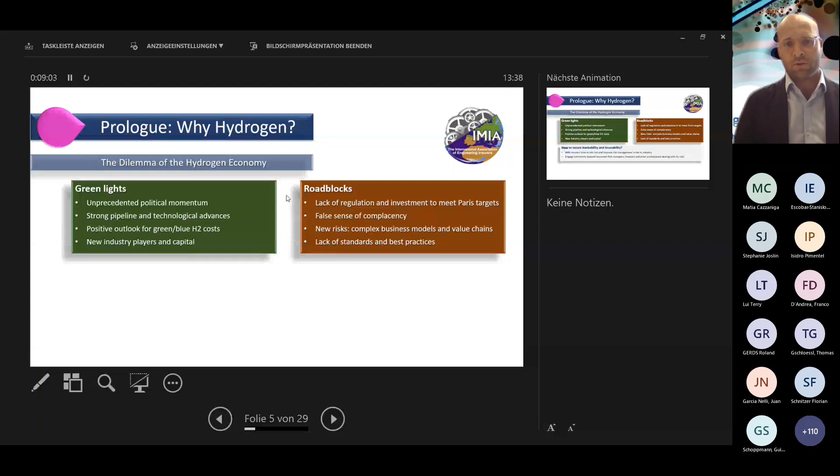Now, for us as IMIA, the question really was, how can we secure insurability and bankability in this vital industry? Our mission, of course, as IMIA is to make a meaningful contribution when it comes to risk management. And we want to engage a community beyond just insurance professionals. We want to reach out to risk managers, to investors, in fact to anyone dealing with risk in this vital industry.

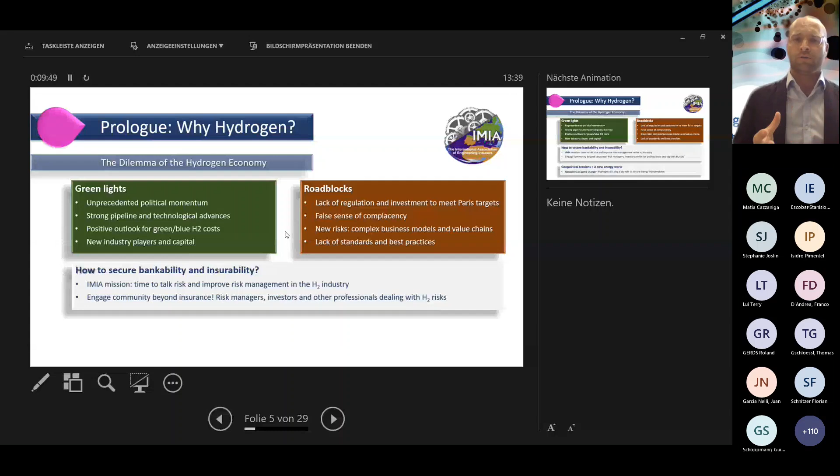And there's one last thing I would like to say, and that's probably true for all of the reports that you've read about hydrogen so far. They have been published prior to the geopolitical tensions that we are seeing at the moment. And we are waking up to a new energy world, one that is clearly focused on renewable energy and on energy independence. And it is clear that hydrogen is going to play a key role in this world.

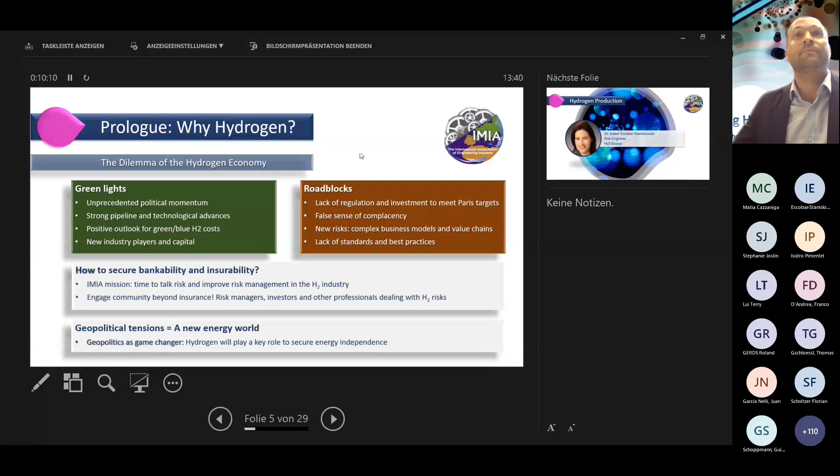Thank you, Carl. So my name is Isabel Escobar from HDI Global, and I want to show you the hydrogen production methods. The first slide.

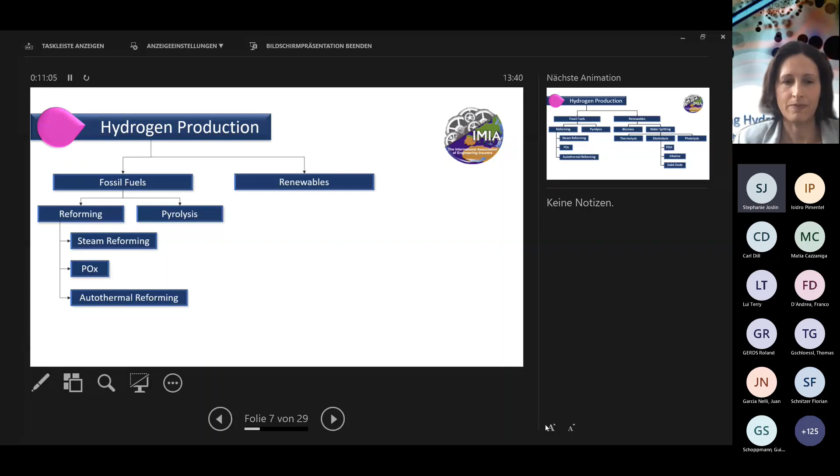So, well, as Carl mentioned, hydrogen is a very promising and powerful energy carrier. It's not found freely in nature, and therefore it must be obtained or produced from other compounds. The conventional way to produce hydrogen is from fossil fuels. Hydrogen production from fossil fuels accounts for about 96% of the total hydrogen production worldwide, which is about 90 megatons today.

However, in order to reduce the CO2 footprint, there is more focus on producing hydrogen from renewables. So the main development that we are seeing right now is the hydrogen production from electrolysis. Isidro, could you please put the electrolysis?

So what we see is that nowadays about 4% of the hydrogen production is done from electrolysis, but we expect that in the next years about 8 megatons of hydrogen is going to be produced from electrolysis.

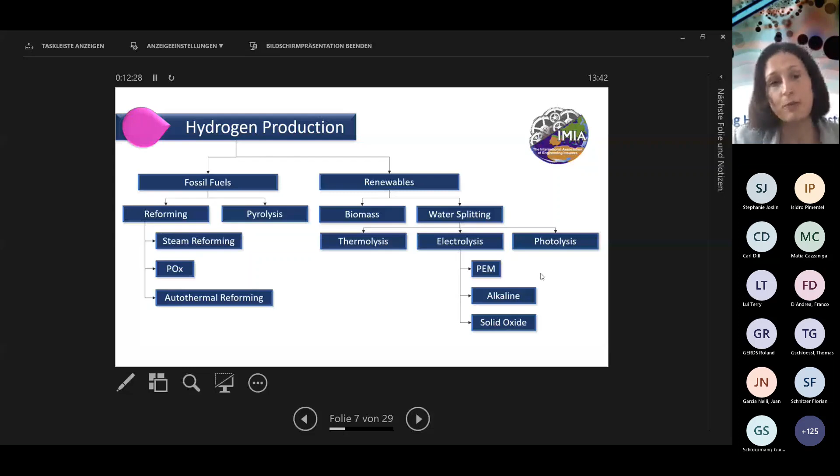There is a very interesting graph from the International Renewable Energy Agency that shows that up to the year 2050, hydrogen production from renewables will increase from 4%, what we have right now, up to 22%. You can see the graph right now. What is very interesting also in this graph is that hydrogen production from coal will increase from 18% to 33%. This is due to geopolitical effects and also due to costs. Next slide, please.

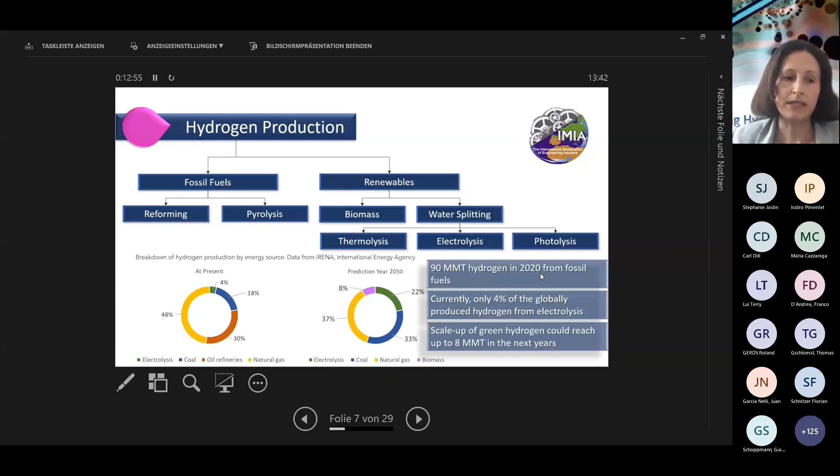So what we see today is that in order to meet the net zero emission goals, there are great attempts, for example, to go from gray hydrogen to blue hydrogen. In the case of conventional hydrogen production methods, like steam reforming, carbon capture, utilization, and storage (CCUS) is being used in order to retrofit or revamp existing plants.

Some advanced catalysts are being used for post-combustion CCUS. However, due to the cost increase compared to the original technology, we do not expect much focus on the development of greenfield projects of SMR with CCUS. However, we do see increasing projects for revamping and also for retrofitting CCUS in existing facilities.

There is a different case for partial oxidation, since it is a highly exothermic reaction and the reaction energy can be used for steam production. The higher operating cost due to higher pressure, and also the cost from CCUS, can be partially offset with the steam production. Therefore, here we do expect some greenfield CCUS for partial oxidation and also retrofitting.

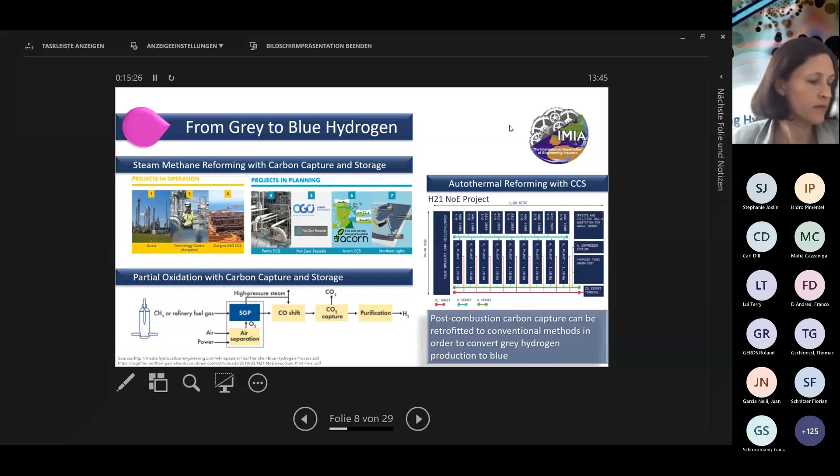Thank you. So now, in the case of green hydrogen, in the last year there has been very strong development in electrolysis. Actually, electrolysis is a very old technology - alkaline electrolyzers have been used for more than 100 years in ammonia production.

What we see right now is a higher attempt to increase the efficiency of the electrolyzers, also to scale them up, and to include different materials. In the 1950s, polymer membranes were developed, and therefore PEMs were introduced into the market. And now we see a higher focus also in solid oxide electrolysis due to the development of advanced ceramics and perovskites.

So what is the future here? The future is to reduce cost, OPEX and CAPEX, by improving the operational conditions, increasing them, improving efficiency, but also introducing new materials and increasing the lifetime.

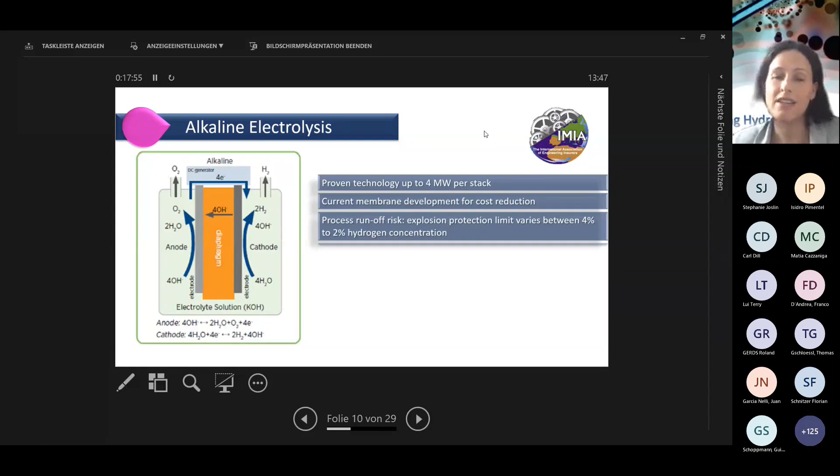Next slide, please. As I mentioned before, alkaline electrolyzers are a mature technique, and the stacks are getting bigger and bigger. From the insurance perspective, we say that they have a proven technology up to 4 megawatts per stack.

It does not mean these are the biggest megawatt stacks that we see, because more or less since the 2020s, we see almost every couple of months the news that the world record has been cracked and a bigger alkaline electrolyzer has been installed - 10 megawatts, 20 megawatts, even 30 megawatts, like the example here of a company in China, where a 150 megawatt capacity plant started commercial operation in November 2021, aimed to generate electricity from wind energy for the electrolyzers, 200 megawatts.

The thing with alkaline electrolyzers is that the membranes used are permeable for hydrogen, but also for oxygen, meaning that during load changes, there is a fluctuation of hydrogen and oxygen between both electrodes, and therefore there is an inherent higher risk for explosion or process runaway. This means some limits must be included in the process safety, and the limit varies between 2% and 4% hydrogen concentration in oxygen. Also, the diaphragm durability can be limited during the operational regime.

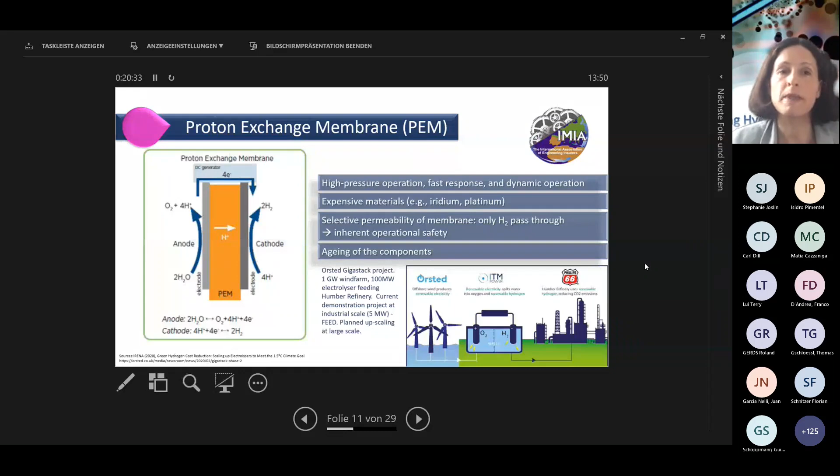The polymer membrane that is used has the advantage that it is only permeable for hydrogen, meaning that load changes do not tend to a process runaway - this process is inherently safe with respect to explosion from the reaction point of view. However, there are also problems regarding the aging of the components, and upscaling of the PEMs is not that easy due to the rare materials being used and the cost.

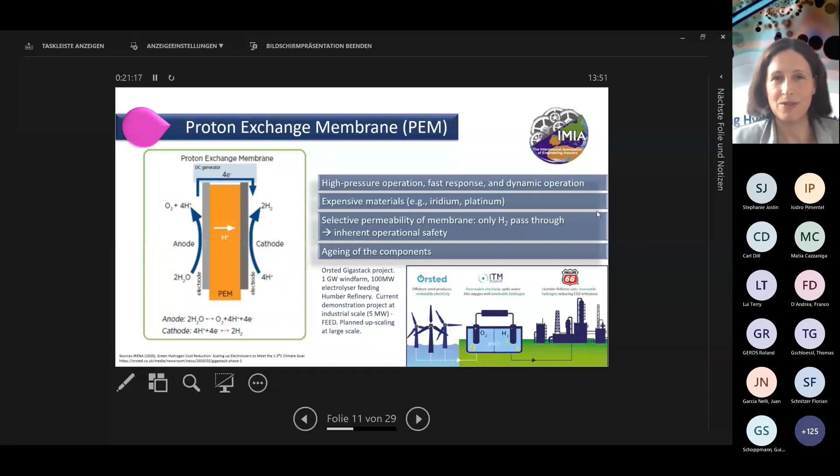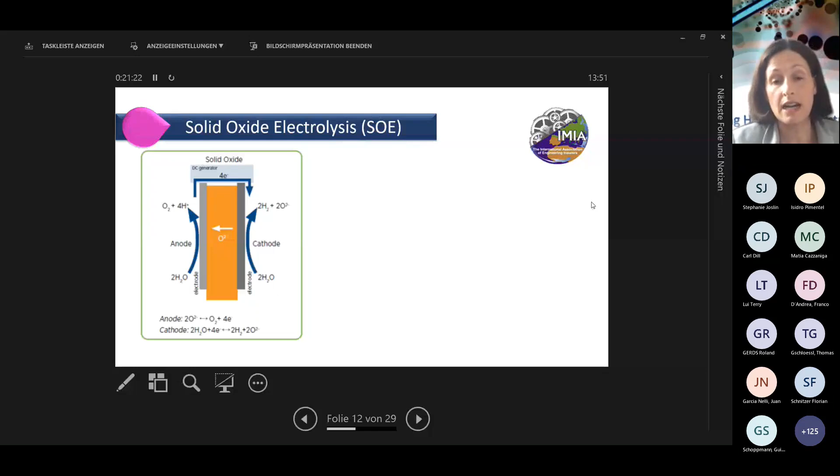Okay, so the last technology that we want to show you in regard to electrolysis is the solid oxide electrolysis. It works at very high operational temperatures of 500 to 600 degrees, meaning that the efficiency can be higher for this kind of electrolyzer, and has the advantage that it can also be used as a solid oxide fuel cell, meaning it can be used for hydrogen production, also for electricity production.

It uses advanced ceramic materials like yttrium stabilized zirconia, and for the electrodes, also advanced perovskites. So far, there are only pilot projects, therefore there is only limited experience, but it's a very promising technology. There are important pilot projects, like, for example, the Green Industrial Hydrogen project, which works with reversible high temperature electrolysis. It's a project from Sunfire and has a capacity of 150 kilowatts.

In our IMIA document, we give an extensive description of the different production methods for hydrogen, also the advantages, the disadvantages, and also the risks. So if you are interested, you're very welcome to take a look into our document. And now Isidro is going to talk about the industrial applications.

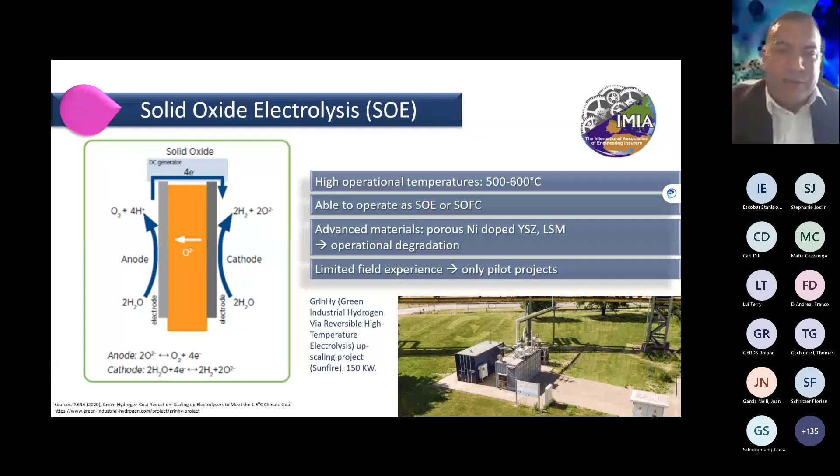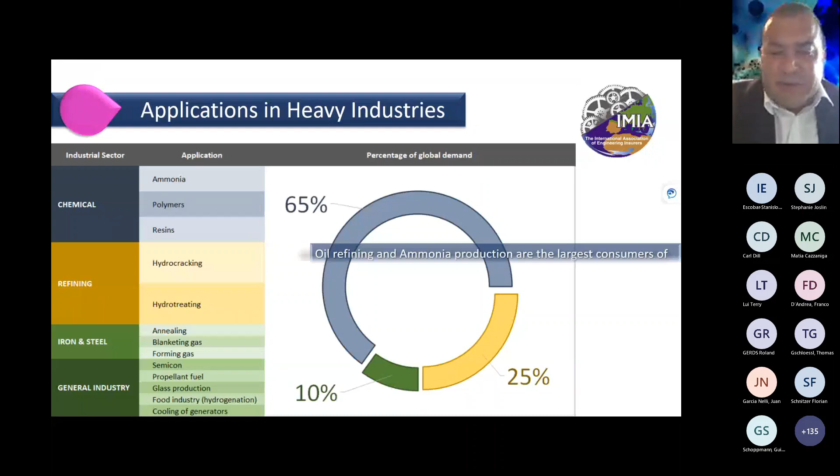Hydrogen is used as a feedstock or fuel in several industries, including petrochemicals, food industry, and pharmaceuticals, as well as metals manufacturing. For decades, hydrogen has been used as a raw material by the chemical industry, mostly in the production of ammonia and hence fertilizers, and in refineries where hydrogen is used for the processing of intermediate products. In metalworking, hydrogen is used in alloying and iron flash making, among other uses.

Especially attractive is hydrogen as an energy storage medium. As a matter of fact, the International Energy Agency recognized that hydrogen is one of the leading options for storing energy from renewables. As you might know, one of the main challenges of renewable energy is the seasonal fluctuation, which represents a big challenge for the distribution networks of the future.

Hydrogen looks in this sense very promising to be the lowest cost clean option for storing electricity in the years to come. While renewable electricity can help reduce emissions in road transport, in the areas of low temperature industrial processes and heating, fossil fuels have today a significant advantage in applications that require a higher energy density, industrial processes that rely on carbon as a reactant, or where demand is seasonal.

In these hard to abate sectors of the economy, especially hydrogen, and especially green hydrogen, could become a game changer for the decarbonization across many industries, and its utilization, in our opinion, is going to vary from small, decentralized solutions to world-scale projects with high complexity.

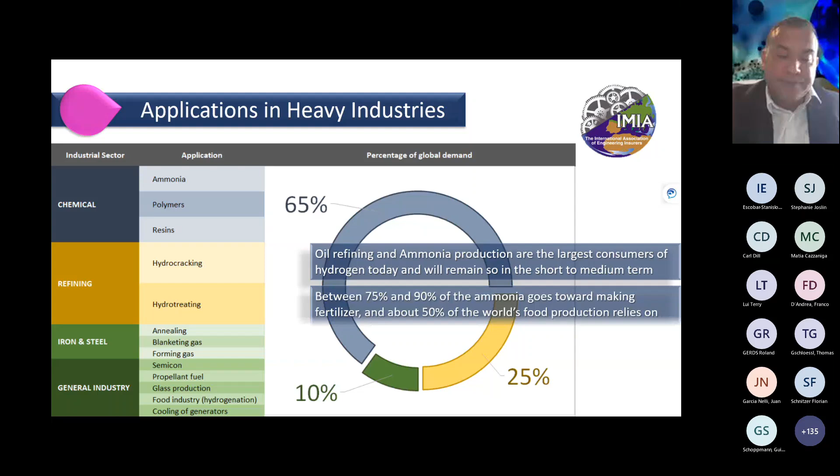Meaningful volumes. This is why it has been discussed establishing technology-specific policy support for green hydrogen in the form of a green hydrogen quota. The paper includes a table summarizing global policy making. Such a quota will create a stable demand for green hydrogen and ensure the financing of the technology learning cost.

Hydrogen is used for two purposes in this process: one is the production of high-grade industrial heat, and the other is for the direct reduction of iron ore into metallic iron, giving origin to sponge iron, without using coke as a reducing agent, without fossil fuels for heating, emissions-free. The sponge iron is then used for crude steel production.

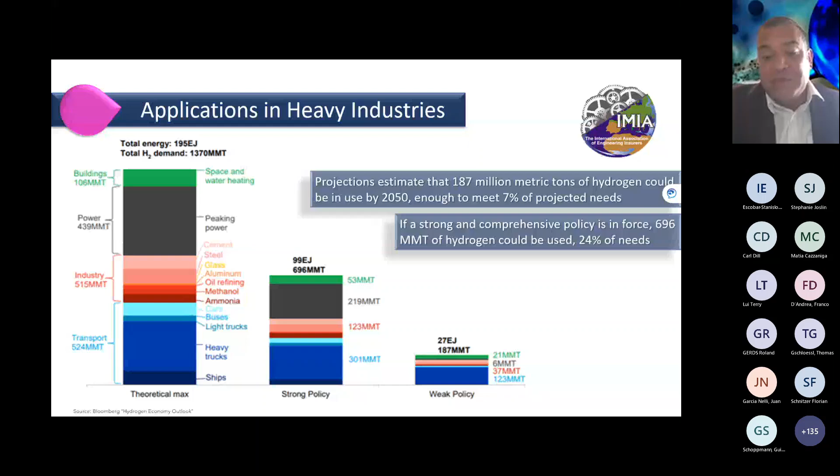The picture here illustrates this, thank you very much, and apologies for that.

The combustion characteristics of hydrogen differ from natural gas very much, and this is a challenge for the design of hot gas path components, especially gas turbine combustors. The reasons are the high reactivity of hydrogen and a lower density.

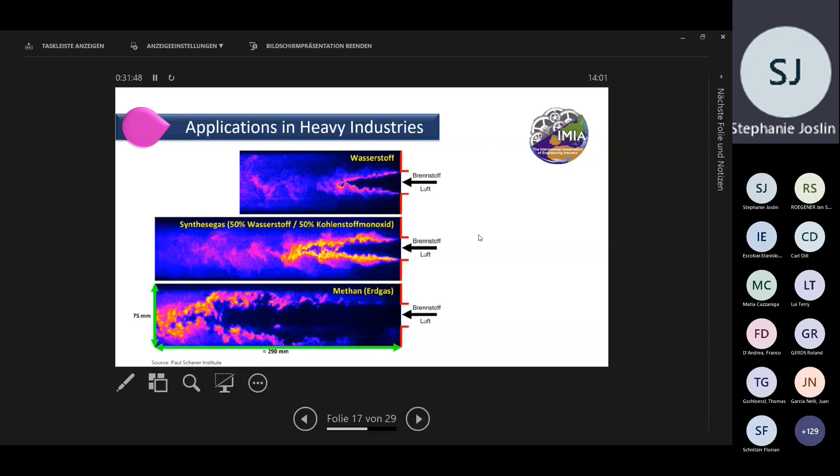That means new types of combustors will need to be developed to be able to burn 100% hydrogen without the need for diluents for emissions control. And to our knowledge, this is in development by most major manufacturers. We held interviews with some research and development departments of major manufacturers and describe in detail in the paper their approaches and challenges.

The development of retrofit solutions for existing gas turbines will be key for implementation of hydrogen gas turbine technology. The periphery components and material selection need special attention due to, for example, embrittlement and operational safety.

At this point, I would like to pass to my colleague Lui Terry to talk about storage and transport.

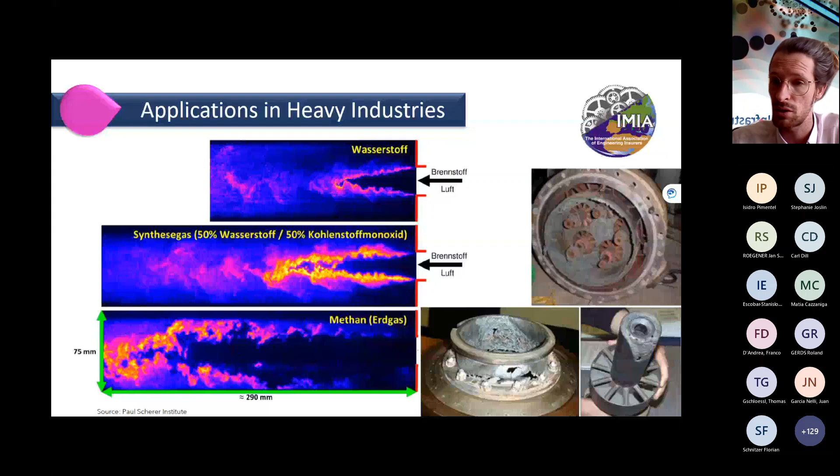Okay, we've got some slides. The idea of the hydrogen economy is not new, and it's been pushed for decades but failed to gain momentum until now. One of the main factors for its recent impetus and global adoption by governments is recognition and acceptance that hydrogen is a viable option to cleanly store energy from renewable sources securely and over long periods of time, giving countries and governments ways to secure greater fuel autonomy and allowing them to decarbonize as well.

In this IMIA Insights paper we're releasing, we give an overview of some of the storage mediums and methods proposed, for you to be aware of, as well as their individual risks and the potential future technological landscape that lies ahead.

Now, compressed gas storage is the most technologically mature storage method that you may well know, with many types of storage cylinder available, and new designs coming up on the horizon, potentially eliminating the explosion risks associated with compressed gas.

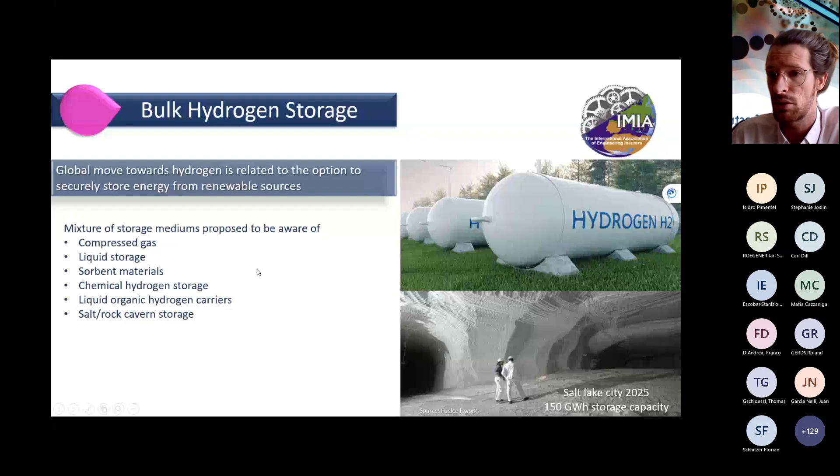The liquid storage method is also a very technologically mature method, with all major industrial gas suppliers using liquid delivery tankers of hydrogen. As a liquid, this is great because you increase the amount of product you can store in the same volume, but you've got cryogenic refrigeration equipment needed, and this comes with increased footprint costs and risks.

Sorbent materials you can think of as molecular sponges, reducing the risk of high pressure. We use low pressures here to suck up the hydrogen. These are not as technologically mature and still require some work, and will likely be seen first moving into the transportation market.

Chemical hydrogen storage, you may well have come across or heard of metal hydrides. This is where the hydrogen is chemically bonded to metals, and within this, thermal management of this storage system is key. There's also liquid organic hydrogen carriers, including ammonia, as well as some alkanes, whereby various catalytic methods are able to release the hydrogen from the carrier.

And finally, we also discuss some of the salt and rock cavern storage that is being seen across the globe, such as the Advanced Clean Energy Storage Project in Salt Lake City, where there's expected 150 gigawatt hours of storage capacity by 2025.

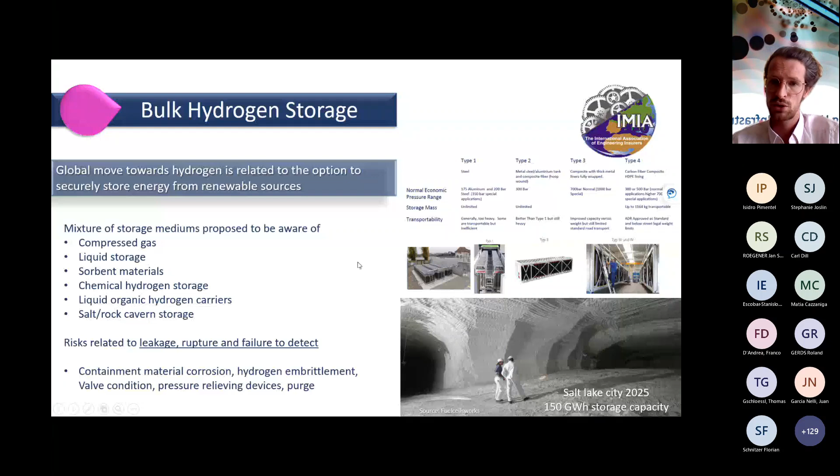But no matter which storage medium we're talking about here, the same risks are related to all of them, and they always link back to leakage, rupture and failure to detect. This may be through containment material corrosion, hydrogen embrittlement, which Isidro touched on, valve condition, pressure relief devices and purge and release mechanisms.

But of course, if we're storing the hydrogen, we also need to transport and distribute it. And the major bit of infrastructure here that we'll be seeing is pipelines. This will be either refurbishment of natural gas pipelines or the implementation and building of new hydrogen pipelines. There's discussion between 100% service and also natural gas hydrogen blends.

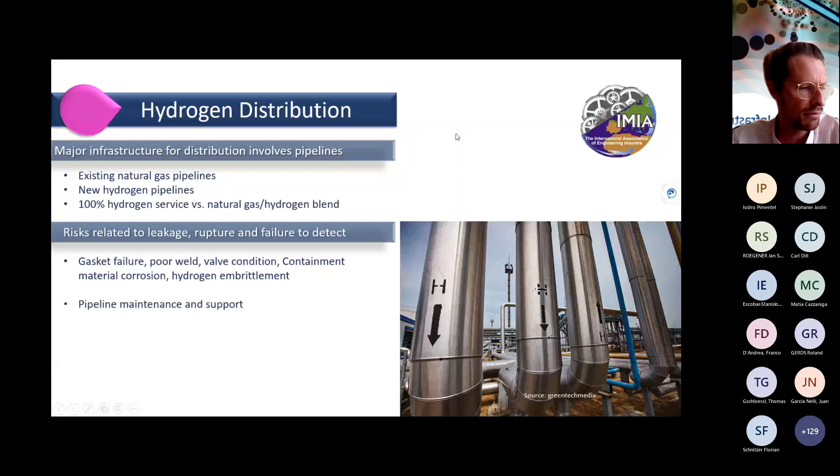In the European Hydrogen Backbone Initiative, there is around, I believe, 116,000 kilometers of new pipeline expected to be built, and around 40,000 kilometers of repurposed pipeline just in this project over the next coming decades.

But the same thing again relates to this: leakage, rupture, and failure to detect, with some similar failure mechanisms we may well be aware of from other pipelines, including gasket failure, poor welding and valve condition, but some more new ones, including hydrogen embrittlement and containment material corrosion. All of this will mean that there will need to be increased maintenance and support of pipelines.

And there are actually some historical claims out there relating to leakage and explosions, such as the Specialty Silicones plant explosion, where failure to detect a leakage in their pipeline caused an explosion. And this is discussed in the paper.

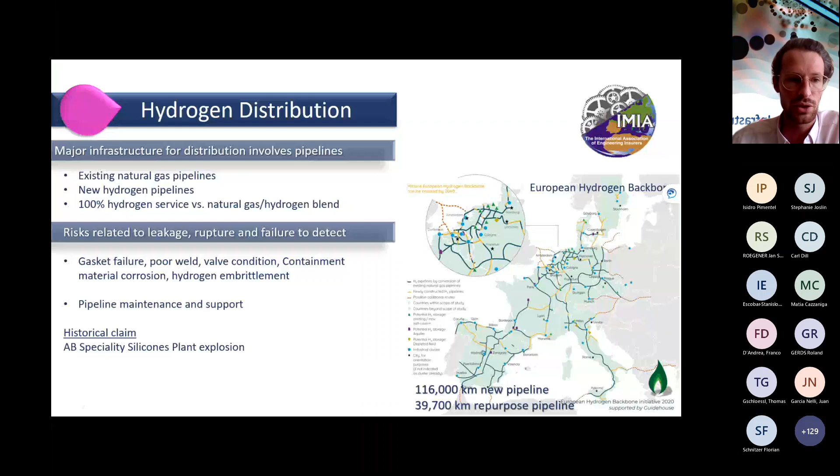Now, finally, one of the new things you may all be wondering about regarding hydrogen is hydrogen embrittlement. And what I would like to stress here to all of you is that currently there is no structural metal that can be labelled as immune to hydrogen embrittlement. Each metal has a varying degree of susceptibility, and there's not a magic list that we can just pick from to say that these are invulnerable.

And likewise, regarding hydrogen embrittlement, when we're talking about elastomers and plastics, these are known to be less susceptible but permeable to hydrogen, so there may be some loss in high pressure pipelines or high pressure storage. You can find more details of this obviously in our paper and the upcoming IMIA paper as well in September.

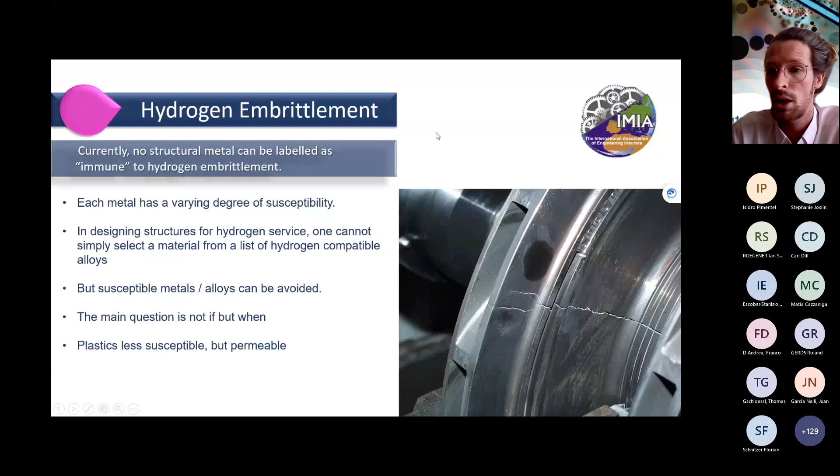I'll finish here and pass on to Carl, who's going to speak to you about the underwriting.

Thanks, Louis. Yes, Louis mentioned hydrogen technology as such is surprisingly old, but it is being used in a new way. And that, of course, creates new risks. So while obvious risks that we know of, such as fire and explosion, continue to remain an issue, we also need to think about these new risks and less obvious risks.

And we are listing a couple here. There are more in the paper, so please take a look at this, but I'm taking you through these here. Well, first and foremost, design and defects. We mentioned the lack of standards. This means there will be a lot of prototype equipment, unproven equipment, and people need to be aware of defect exclusions, maintenance covers, and also warranty covers.

Hydrogen comes in modular forms. Electrolyzers come in stacks, and they are being scaled up. This means repetitive operations, the same kind of equipment being used over and over again, and this calls for serial loss clauses. Also, people should think about the occurrence language in policies and the event definition - how many losses, for instance, constitute one occurrence, and so on.

Testing and operation is very critical. As we've heard, a lot of the risks with electrolyzers comes from the altering patterns of operation. And again here, there's little standards, there's little experience, so proper policy terms, solid definitions, and also deductibles should be considered.

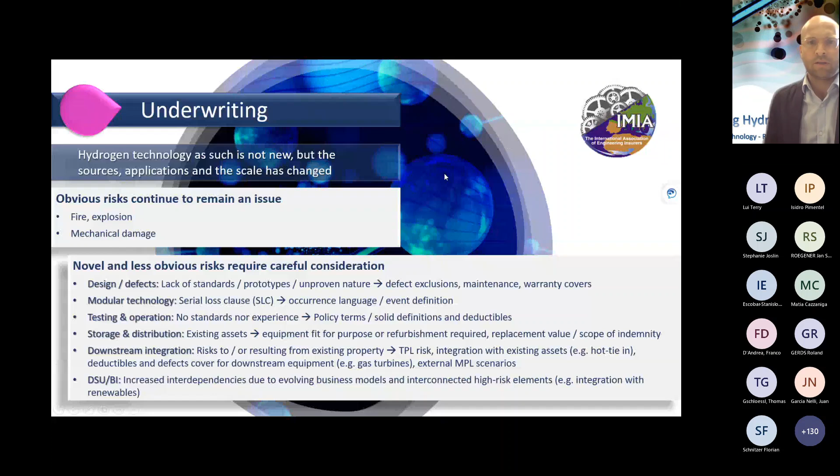Now, with these considerations in mind, I would like to hand over to Isidro for the risk mapping that we've conducted.

Thanks. You might allow I let the camera switch off. Don't touch the working system. Looks like it's working right now. Apologies for that.

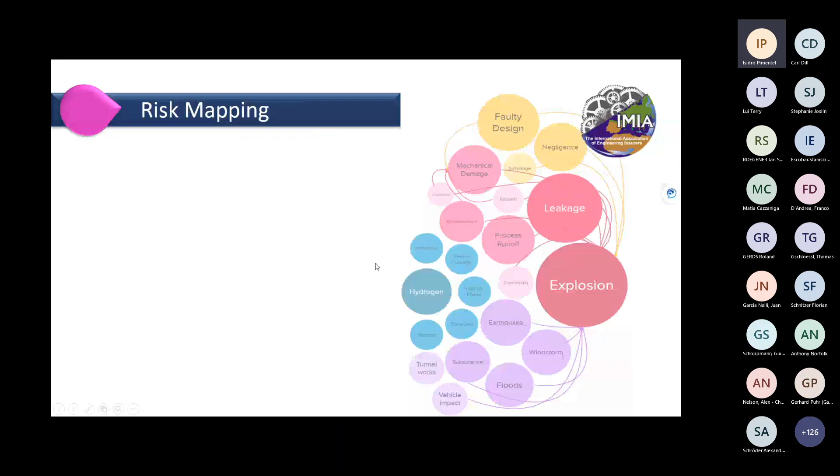During the work within the group, we will present the risk mapping regarding risks associated with hydrogen.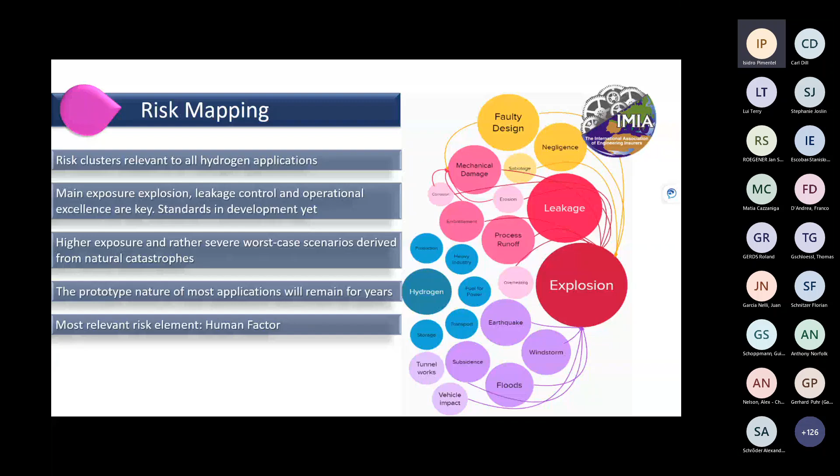We draw some conclusions. For example, risks associated to design, especially to material selection and operating parameters, such as embrittlement, corrosion, erosion, can be considered as risk clusters relevant to all hydrogen applications. Same applies to the main exposure, which is explosion, which increases sensibly the relevance of high design standards, detection systems, leakage control, and especially operational excellence.

This is even more challenging while retrofitting existing plants and processes. High exposure and rather severe worst case scenarios derived from natural catastrophes.

Same applies for the human factor - negligence, malicious damage, lack of experience, lack of training, lack of procedures, especially emergency procedures, as well as cyber exposure, can rapidly aggregate to catastrophic events. That means access control, work and safety procedures, safety plans, emergency plans, and cyber security are more important.

A number of applications are being investigated, developed, implemented, and scaled up. Every second day you hear about a new project about hydrogen, a new application, a new technology. That means the prototype nature of most applications will, in our expectation, remain for many years. Again, it is important to point out that not only prototypes and unproven technologies are critical.

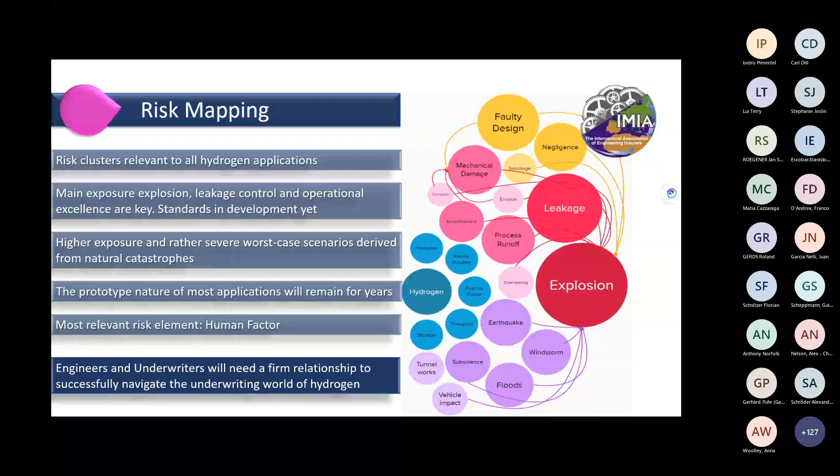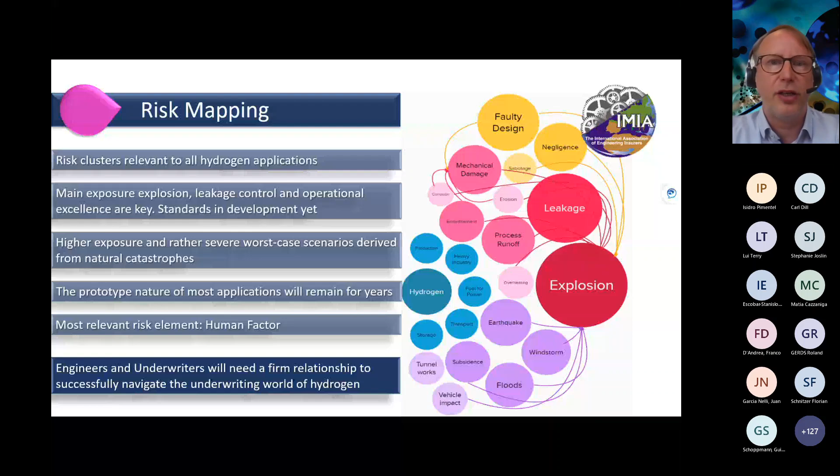I still see the risk mapping page, but I can start talking. Next page, please.

So what happens if the risks materialize? We've researched claims databases on historical claims related to hydrogen in general infrastructure, including storage, transport, and chemical industry, refineries. You can look at the root causes on the left, or better read the paper for more details. There are two statistics on the right top from the HIAD 2.0 databases. But these statistics do not represent future expectations, especially not for new technologies like large electrolyzers and renewable energies. It just shows that hydrogen has been used in different applications in the past already.

Can you click on the bottom? There should appear a real claim example. So in the real claim example, green hydrogen production, some risks materialized.

An experimental fuel cell power system exploded in the South Korean city of Gangneung during a test operation. Three tanks of 40 cubic meters capacity each were all destroyed and sent debris across an area of well over 3,000 square meters. There's no additional slide, it's just some text.

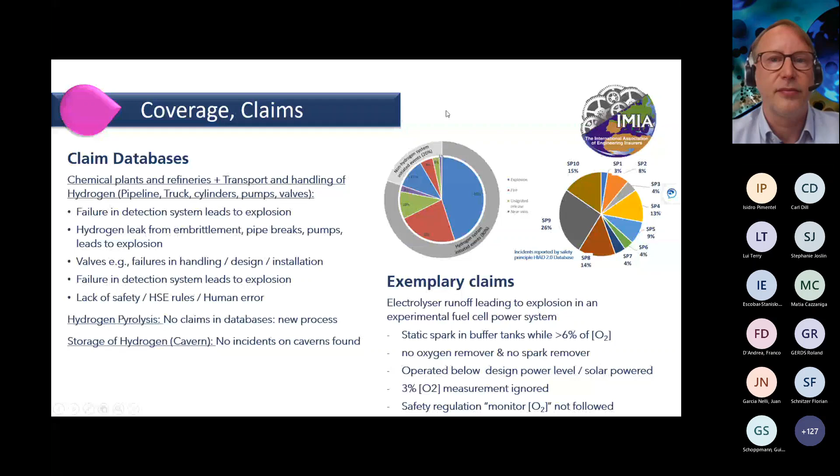In the full paper, we look into our crystal ball and consider a number of hypothetical claim scenarios and issues. What is on this slide is simply a snapshot of some of those issues considered in more detail.

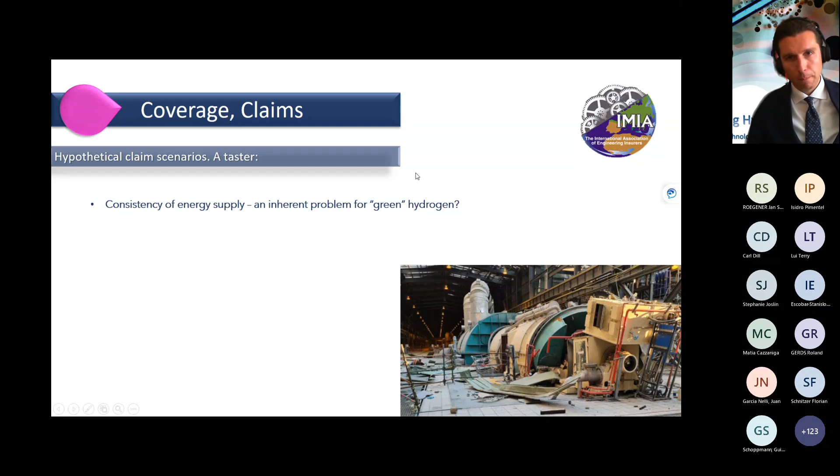One feature of electrolyzer membranes we've been hearing is that they require a consistent power supply. With that in mind, picture a hypothetical green hydrogen project, say a hydrogen production facility connected to a wind farm. What happens when the wind input is reduced or stops over any given period? Accordingly, underwriters, in our view, are well within their rights to ask what alternative power supplies are available to maintain that consistent power supply required.

It's also likely that claims professionals, when they come to consider these claims in relation to membranes, will need to be asking these same questions at the claim stage.

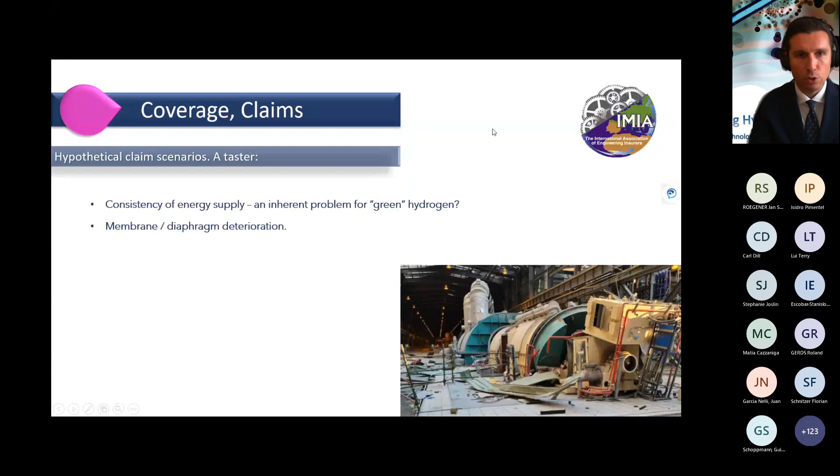But there are two related issues to this point. Firstly, the fact that an electrolyser is a very significant proportion of the overall costs of an industrial hydrogen project clearly means any claim in this area has potential to be significant. Secondly, the lifespan of membranes and diaphragms, as we've been hearing, is limited and will be heavily dependent on the consistency of the power, but also on the project's operational regime.

Now, the consistency of operation within design parameters is then clearly something that claims professionals will have to consider when faced with hydrogen claims of this type.

The same can very much be said about hydrogen infrastructure becoming obsolete quickly. We heard earlier from Isabel that electrolysis development has moved towards PEM electrolysis, but even now new membranes are on the horizon. So from a claims perspective, what happens when a customer's entire electrolysis concept becomes obsolete around the time of a claim?

Another issue is the replacement components and the materials that make up those components being very expensive and having very long lead times. Now, we appreciate, of course, that this issue does not only affect hydrogen infrastructure now, but new use technology is almost always likely to face the greatest risk in demand.

By way of example, it isn't just the membrane or diaphragms that are tailor-made to a project. The same can be said of, say, hydrogen compressors, and lead times for those items, as we understand it, are at around 18 months at present. Now that is, of course, a significant issue for your physical damage type claim, but any lead time like that is also very significant for business interruption.

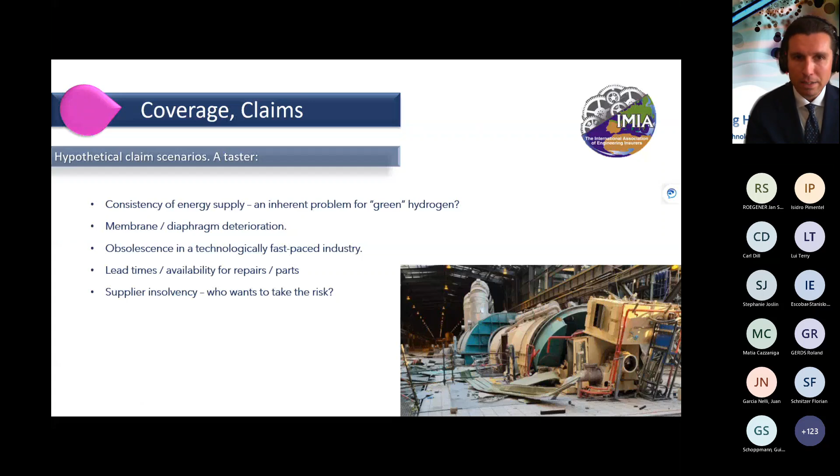Now, I make no apology for repeating again that we're dealing here with new and cutting edge technology, but with that new technology comes opportunities as well as risks. But from a risk perspective, what happens if the supplier of your, say, bespoke electrolyser membrane system becomes insolvent?

In other books of business in recent times, underwriters have faced claims that should probably otherwise have been recoverable from a manufacturer under a warranty, but the relevant manufacturer has then gone into insolvency. How this issue is then approached by the insurance market, by different insurance markets, and by insurers communally will be a significant feature, in fact, one of the defining features of the early years of insuring green hydrogen projects.

I'm now going to pass you back to my colleague Isidro for a final wrap up. Thank you.

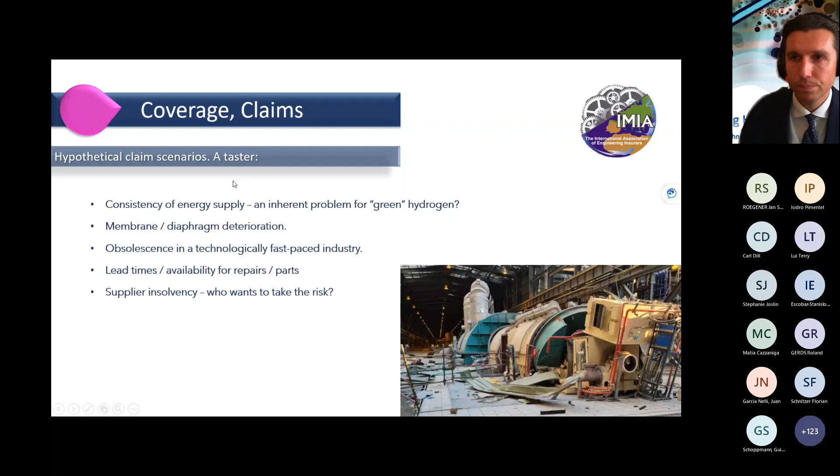Isidro, is that up to you for the final closing? Yes, Mattia, you can add whatever you want.

Thank you, Stephanie. Okay, we've got two questions that came in right at the beginning. One is, how do you define proven, and is proven a question of capacity or a variety of factors such as capacity, pressure, current, materials, etc.?

So thank you, Stephanie. I think this question is addressed to me. We do not have any definition of proven. What we've seen is the typical bathtub curve. When you have a new development, in the early years you have to deal with all of the problems due to faulty design or design issues, process safety, materials, and so on. As I mentioned, the technology itself is not new. The problem is the scaling up. And of course, scaling up brings some problems with it, because the bigger the stacks are getting, then of course the behavior of the process is different.

What we want to see is field experience with all what it requires, meaning load changing, real operating conditions, high load, base load, also the condition when the stacks need to be energized but no hydrogen is being produced. We are discussing with our colleagues that what we want to see is at least 8,000 equivalent operation hours. We are seeing that this terminology EOH, which is common for gas turbines, is now also being applied for electrolyzers, since the downtime when the stacks are energized also affects the lifetime of the components. We want to see that when a new product is introduced to the market, these early issues are being addressed and solved. That's why we do not talk about proven technology when a new electrolyzer starts its first year of commercial operation. I hope I could answer your question.